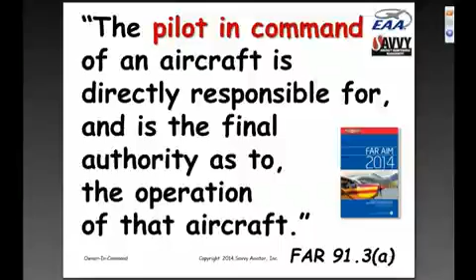So all of us, whether we're flying a Cozy or a Dreamliner, we're pilot in command. We have this very, very heavy responsibility for the safety of the flight, and we also have enormous authority to carry out that responsibility. In fact, our authority is so absolute when we're acting as pilot in command that FAR 91.3 says that in an emergency, we are authorized as PIC to deviate from any rule or regulation to the extent necessary to deal with that emergency.

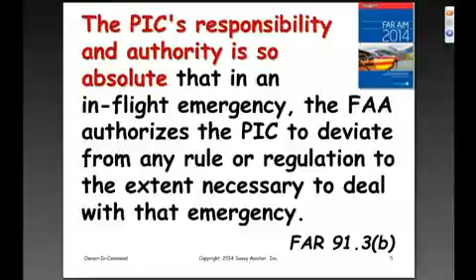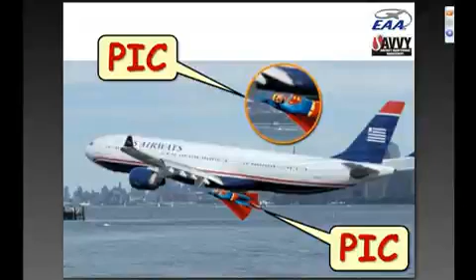Probably the best known case of that is this. There's Sully closing the door after he made sure that everybody got out. Actually, Jeff's role in this whole thing is a little bit underplayed, but this is one of my favorite pictures of the Miracle on the Hudson with Jeff helping out there.

Here are a couple of other good PIC pictures, but to get serious about this: in my 45 years or so of flying, of being an aircraft owner and flying my airplane across the country, I've heard a lot of stuff on ATC frequencies, and heard a lot of pilots, some of them encourage me, and some of them discourage me. Let me give you an example of an actual exchange I heard some years back, probably quite a few years back, between a Cessna 182 pilot and air traffic control. This is just a small snippet of the conversation, but it'll give you the general idea.

ATC says, Skylane 123, are you declaring an emergency? The pilot says, I guess so. ATC says, Skylane 123, say fuel and number of souls on board. Pilot says, Center, there are 3 on board, I think I have about 45 minutes worth of fuel. What should I do? ATC comes back and says, are you instrument rated? The pilot says negative. You can get the general flavor of what was going on.

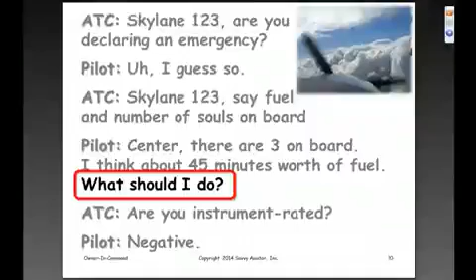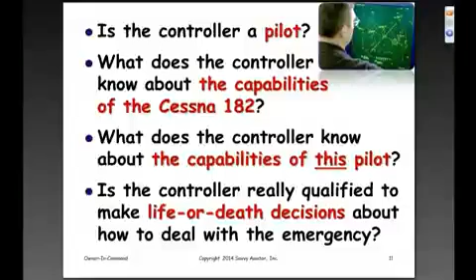You know, before the pilot did something like this, some of the things that really ought to be going through one's mind: is the controller a pilot? Does he know anything about the capabilities of a Cessna 182? Does he know anything about the capabilities of this particular pilot? And most importantly, is the controller really qualified to be making life or death decisions about how to deal with the emergency? Should the responsibility for that be moved from the pilot's seat to the ground? I don't think so. This pilot just abdicated his pilot in command responsibility, and when I hear something like that, it doesn't set well with me.

Here's another exchange that I heard some years ago when I was flying across the country, and it occurred in the general vicinity of Phoenix, Arizona. Pilot: Center, Merlin 456 is experiencing a pressurization problem, we need to descend immediately. ATC: Merlin 456, Albuquerque Center, maintain flight level 240, expect lower in 25 minutes. This controller obviously doesn't have a clue as to what pressurization problem actually means.

Pilot: Center, Merlin 456 is declaring an emergency, vacating flight level 240 for 10,000. What heading would you like us to fly in our descent?

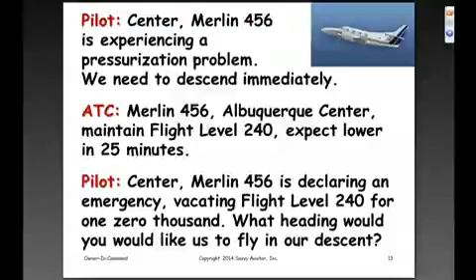This guy was pilot in command. He said, hey, I'm flying this airplane. I got a problem, I'm going to do what I need to do. You're there to help me. And that is exactly the attitude that a pilot in command needs to have.

Now, as pilots in our early training, we're taught about this whole PIC concept from our earliest days as student pilots, and hopefully, as we have matured as pilots, we have learned how to carry out that responsibility more and more effectively. But a similar concept applies to aircraft owners with respect to their responsibility and authority regarding maintenance of their aircraft.

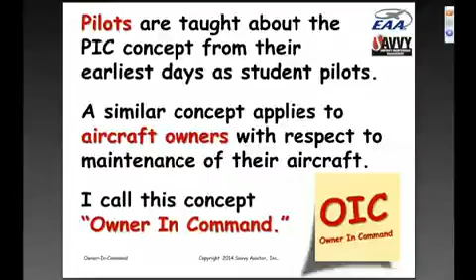And I call that concept owner in command. In the same way that pilot in command is articulated in the FARs in FAR 91.3, owner in command is articulated in the FARs in 91.403, which is kind of a nice parallel. And what 91.403 says is that the owner of an aircraft is primarily responsible for maintaining that aircraft in an airworthy condition, including compliance with the airworthiness directives.

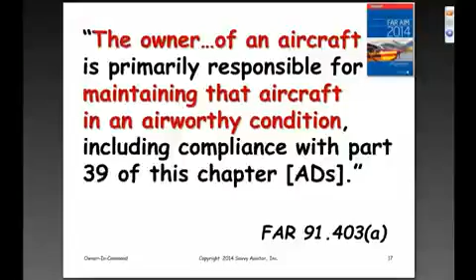Many owners, when they transition from being simply pilots to being aircraft owners, are really unaware of the heavy regulatory responsibilities that they bear with respect to airworthiness and maintenance. The reason is primarily that to get a pilot's license, we have to go through a lot of studying and testing and instruction and a check ride and all sorts of stuff.

So when we finally become pilots and get our pilot certificate, we're pretty up on this stuff. But when we transition from being a pilot to an aircraft owner, we don't have to go through any of that. There is no such thing as an aircraft owner certificate. The way we become aircraft owners is we write a check. No training, no testing, no studying, no check ride. We just write a check and suddenly we become an aircraft owner. And now 91.403 applies to us, but nobody's really taught us about that.

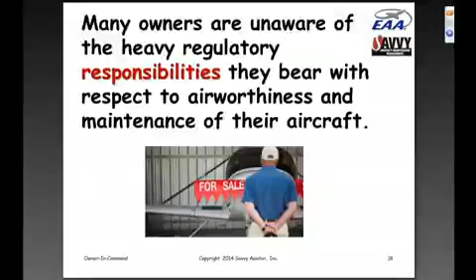So a lot of owners simply don't really understand what their responsibilities are, and even more importantly, what their authority is as aircraft owners. Most don't understand that the regulations give them a tremendous amount of authority, all the authority they need to carry out their responsibilities as being primarily responsible for airworthiness and maintenance.

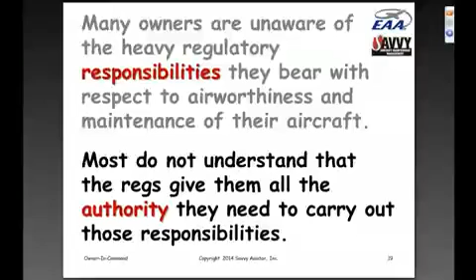A lot of aircraft owners feel that mechanics get to call the shots when it comes to maintenance, and they're just bystanders who wait for the invoice and write the check. And that's not what the FAA intends. That's not what the regs say, and that's not the way things really ought to be.

Owners are, of course, permitted by virtue of being aircraft owners to perform a wide range of preventive maintenance tasks on the aircraft, from oil changes to spark plug changes to tire changes, all sorts of things. There are a couple of dozen specific preventive maintenance tasks that the FARs allow an aircraft owner to do on a certificated aircraft that he owns without getting a mechanic involved. Some owners take advantage of that. Some owners prefer not to.

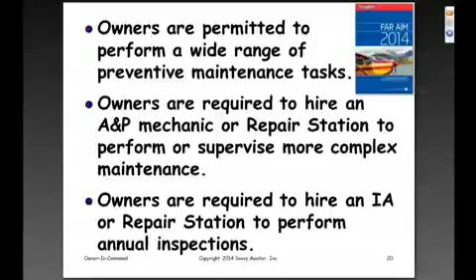When we get to more complicated maintenance, owners are required to hire an A&P or a repair station to do that, to either do it or at least supervise it, take responsibility for it, and sign it off. Then once a year, we're required to hire an A&P mechanic with inspection authorization or a repair station to perform annual inspections. Now, that's a quick summary of the rules for certificated aircraft. For EABs and LSAs, the rules are a little bit different as to who is allowed to do what. But regardless of who does the actual work on the aircraft, the owner is always responsible for the outcome in the eyes of the FAA.

It is not mechanics that are responsible for maintaining the aircraft in airworthy condition. It is the owner who is responsible, and mechanics are simply people who the owner hires to help him carry out that responsibility.

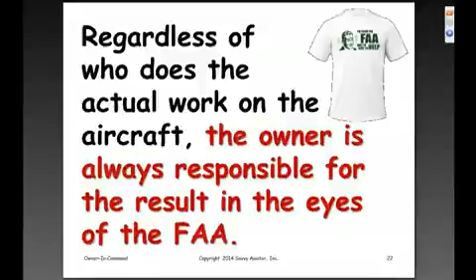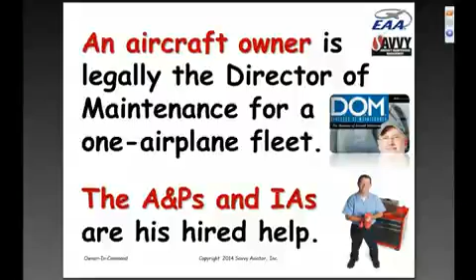So a good way to think about it is that an owner of an aircraft is treated by the FAA as essentially the director of maintenance for a one airplane fleet, and the A&Ps and IAs that the owner hires are his hired help. He typically doesn't actually hire them as employees. He hires them as independent contractors, the way you would hire other skilled tradesmen. But basically, the aircraft owner is the person who's supposed to be calling the shots when it comes to maintenance, and the professionals that he hires are people that are supposed to help him carry out his responsibilities under the regs.

A metaphor I like to use to explain this is that the role of the aircraft owner, or what I call owner in command, is to act like a general contractor in charge of the maintenance of his aircraft, hiring people to help him do that. An A&P mechanic is a licensed, skilled tradesman. Think of him like a plumber, roofer, or electrician who has special training, special tools, and a license from the government that says he's passed tests and is competent to do what he does. He's hired by the aircraft owner, the general contractor, to perform specific tasks, repairs, and alterations.

The IA, who we need to hire once a year, is a licensed inspector, much like a building inspector, whose job is to determine if the aircraft meets code. In this case, code is Part 43 of the FARs. The situation is very similar to building a house, where you've got a general contractor who hires various skilled tradesmen to do specific kinds of work, and then brings in a building inspector to make sure the work has been done properly and the building, or the aircraft, is in compliance with the regulations.

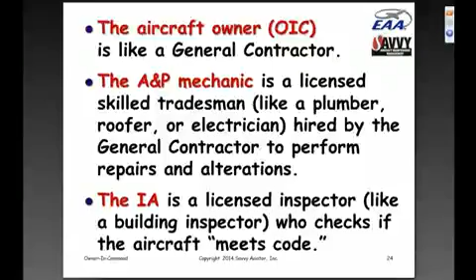So, at any rate, the owner in command's job as general contractor of the maintenance of his aircraft is to select, hire, and manage these subcontractors, and if necessary, to fire them if they're not doing a good job. It's very much a command kind of responsibility. A lot of owners don't treat it that way.

A lot of owners don't understand that they're supposed to treat it that way. Many owners will put their airplanes in the shop, hand over the keys, and say, "Call me when you're done." That's not exactly the active management role that an owner in command is supposed to take, and that the regulations contemplate.

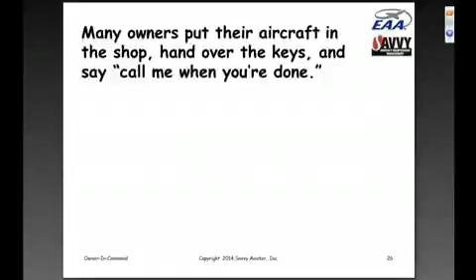Some owners will give their mechanic carte blanche. They say stuff like, "Do whatever it takes to make the aircraft safe," and then they don't actually even know what work is done until they get the bill. Again, they're not managing the process. They're abdicating their responsibility when they do that.

And many owners act as if it's the mechanic who is responsible for maintaining the aircraft in airworthy condition. But we know that 91.403 says it is the owner who is primarily responsible for maintaining the aircraft in airworthy condition, and we're not supposed to be passing the buck like that.

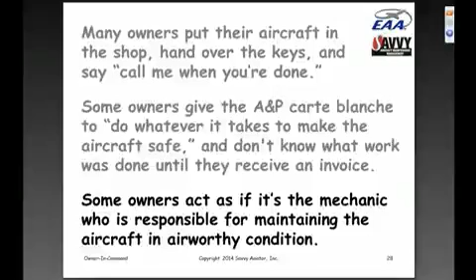If we do that, isn't that a lot like the pilot, the Skylane pilot, who asked ATC, "What should I do?" Who's in command of this operation? Is it the owner or is it the mechanics? Well, the FAA says it's supposed to be the owner. And you can be sure the owner will be held responsible for whatever the mechanics do, because he is at the end of the day responsible for the airworthiness of the aircraft.

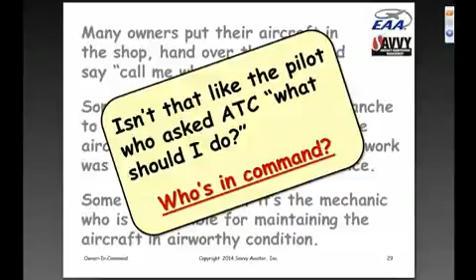And in the same way that a pilot in command needs to remain in control when the airplane is in flight, the owner in command needs to remain in control when the aircraft is undergoing maintenance. He doesn't have to do the maintenance, but he has to be the decision maker.

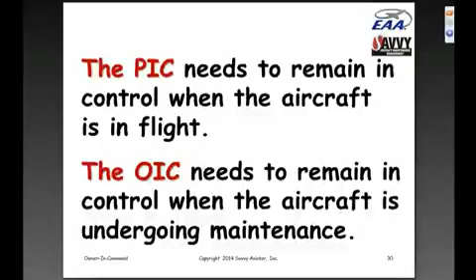Now, I talk to a lot of aircraft owners who say, "Look, I don't know anything about maintenance. I don't even want to know anything about maintenance. Isn't that my mechanic's job?" And if you take that attitude, you're sort of missing the point.

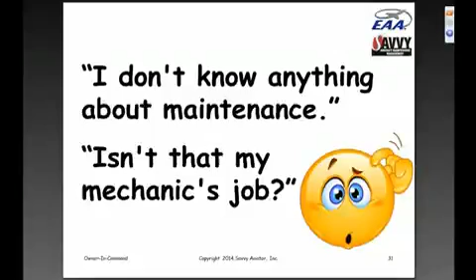Going back to the building analogy, if you told your plumber, electrician, roofer, or auto mechanic, for that matter, just do whatever it takes and bill me when you're done, the chances are you're not going to be happy with the result. If you're building a house, you're going to tell the plumber what kind of toilets you want and where you want the shower and bathtub. You're going to tell the electrician where you want convenience outlets and whether you want the house plumbed for Ethernet. And you're going to tell the roofer what kind of roofing materials you want—do you want a metal roof, a concrete tile roof, and so on.

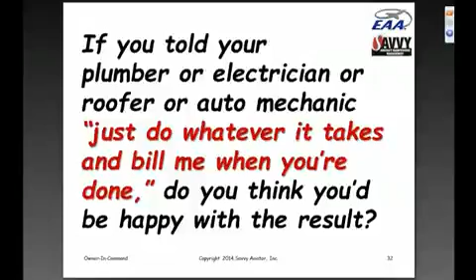You're not just going to say, go do your thing and send me a bill. You're going to tell them what you want them to do, and you're probably going to ask them to give you an estimate, and then make sure you approve the estimate before you give them the go-ahead. Well, we need to take that same attitude when dealing with mechanics and maintenance on an airplane.

So how can an aircraft owner learn to take command of maintenance? You don't have to learn to be a mechanic, but you do need to learn enough about your aircraft and its maintenance so that you can make informed maintenance decisions and evaluate the advice you get from your mechanics.

It would be similar to if you had to go in for cardiac surgery. I don't know about you, but I would certainly want to bone up on it before I approved the surgery and selected the surgeon and all of that kind of stuff. I want to do my homework.

Years ago when I was actually diagnosed with a rare form of leukemia, you can't believe how much research I did on that and how carefully I picked my oncologist. Fortunately, we did everything right, and I'm about 15 years out from the leukemia and cancer free. But boy, I sure took that pretty seriously. I didn't just turn myself over and say, "Do me."

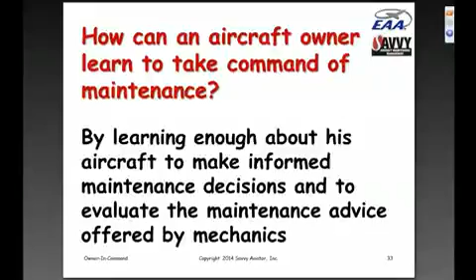We need to take that sort of attitude when we're talking about our airplanes, because that's life and death stuff too. Now, like anything else in aviation, it takes some effort to master learning enough about maintenance to make informed decisions and evaluate the advice you receive from mechanics.

But today, aircraft owners have unprecedented access to maintenance expertise. The advent of the internet and Google and laptops and smartphones have been total game changers for aircraft owners, because we now can get really smart about stuff really quickly.

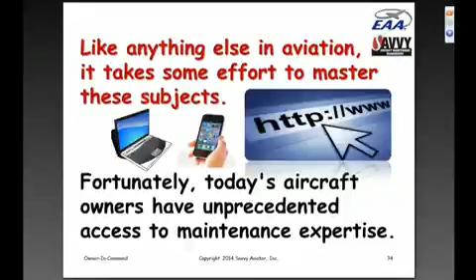One of the best places to get smart about maintenance on your aircraft are the type clubs, and there are a whole bunch of them. I've been very involved with the Cessna Pilots Association over the years, involved with the Bonanza Society for a while, and I'm still very active with the Cirrus Owners and Pilots Association. But there are all these type clubs that are sources of enormous expertise on various kinds of airplanes.

They typically have online forums where you can go get questions answered with remarkable speed. If the type club doesn't know the answer, they know who knows, and they can give you a vector. So I'm a big fan of type clubs. It's a tremendous resource for aircraft owners to get smart about maintenance issues on their airplanes and to evaluate what sort of maintenance decisions they should be making.

These EAA webinar series are another great resource. I just checked, I've done 36 of them now that are all online on the EAA video server. I didn't have room to list them all, these are about half of them, I think. There's a tremendous amount of good maintenance information on the EAA webinars, not just the ones I've done, but a lot of other presenters have as well.

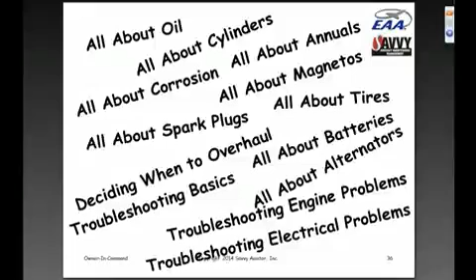One of the webinars I did that is a really good starting place for aircraft owners is called 5 Secrets of Cost-Effective Maintenance. I'll call them 5 Secrets for Owners in Command. There's a whole webinar that goes through this stuff, but the 5 secrets were simply choosing your shop or mechanic very, very carefully, the way you would choose a surgeon, for example.

Most owners are not very good at doing this. They typically will just use the mechanic on their home field without really evaluating whether that mechanic is competent to do the work they need. When we manage maintenance for our clients, we will typically use different shops for different things, because some things require different skill sets, and we're very big believers in going to specialists. Again, it's very much like medicine in that regard.

The second secret is don't approve any work until you receive a written estimate. This notion of giving shops a blank check is a very, very bad idea. We don't do that when we take our cars into the shop.

Most states have a law that says an automotive repair place isn't allowed to even work on your car until they've prepared a work order with a specific estimate, itemizing the work they're going to do, telling you what it's going to cost, and actually getting your signature on the work order before they're authorized to proceed. I think that varies a little bit from state to state, but the rules are pretty much the same in most states.

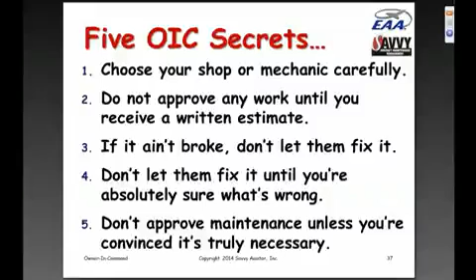And finally, don't approve maintenance unless you're convinced it's truly necessary. Probably half the maintenance that gets done on owner-flown airplanes is maintenance that didn't need to be done, probably shouldn't have been done. So you want to be very selective about what you approve and what you decline, remembering that it's always the owner that needs to be in control of these decisions. You don't have to do the work, but you have to make the decisions as to what to do and who to have do it.

Above all, owners need to stay in control of the maintenance of their aircraft. Again, this is the owner in command concept, and you need to be the command authority. Owners need to act like owners in command. They are the managers of the maintenance, and so they should be active managers.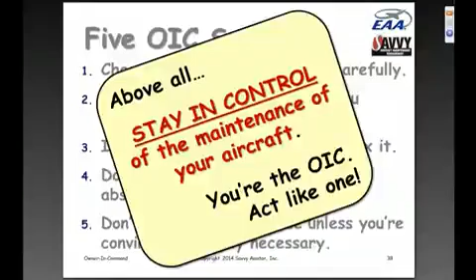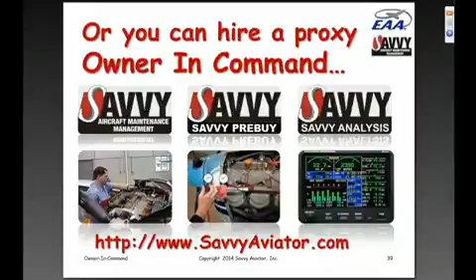Some owners don't want to get that hands-on. There are other options, in the same way that if you didn't want to fly your airplane, you could hire a pilot to fly you around. You can, if you want, hire somebody to act as your owner in command proxy, if you will, and manage the maintenance of your aircraft for you. That's pretty much what I do in my day job. But for most owners, the better part of valor is to learn enough about the maintenance of their aircraft that they can manage it themselves.

So the bottom line is we want you to take your owner in command responsibilities seriously, and realize that not only does the FAA hold you responsible for the airworthiness of your aircraft, but also gives you all the authority in the world to carry that out. You are supposed to be the boss of this process, and I encourage aircraft owners to act like that.